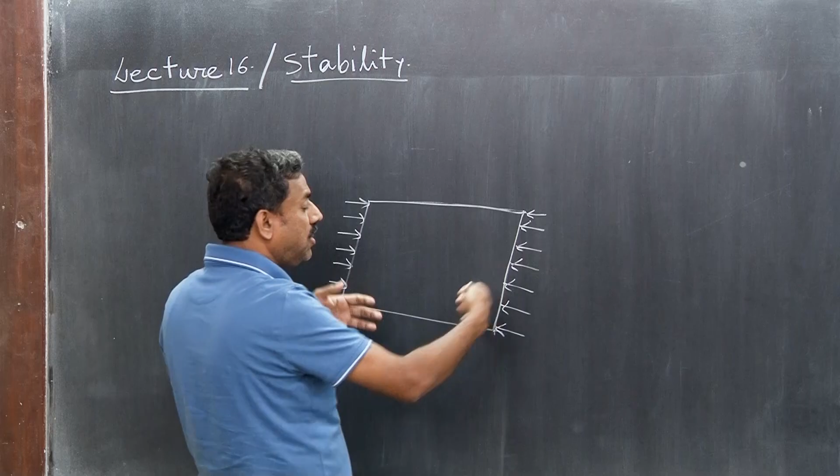We have seen that just on the verge of buckling, the plate is subjected to uniform compression. In the pre-buckling regime also it is uniform compression, but as soon as it buckles and we compress it further beyond critical load, Nx goes beyond critical.

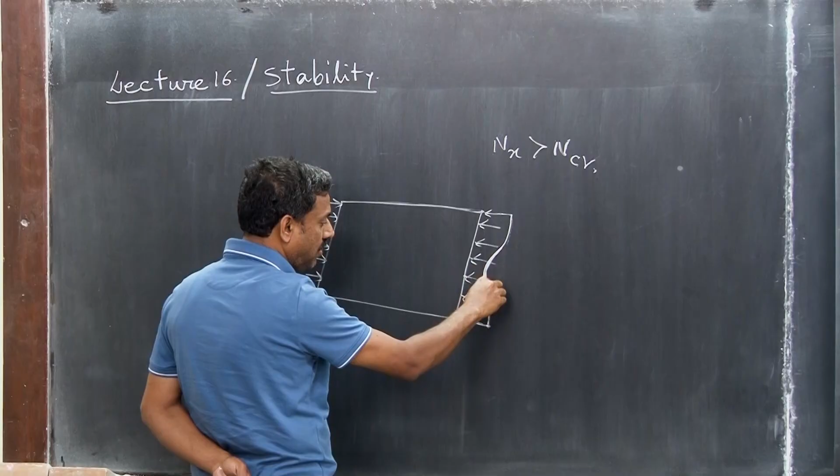So what happens? This force starts redistributing. The end portion starts carrying more load, whereas the middle portion's load-carrying capacity basically reduces. This kind of redistribution occurs, and as you go further, the end carries more load and the middle carries less.

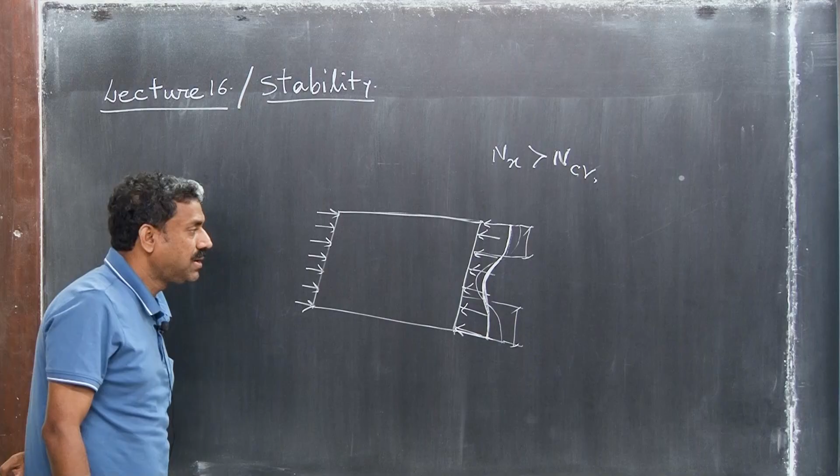At the end we may assume that the load is essentially carried by the two end strips, and from there we introduced a concept like equivalent width for this, which has been adopted in the American and Canadian codes.

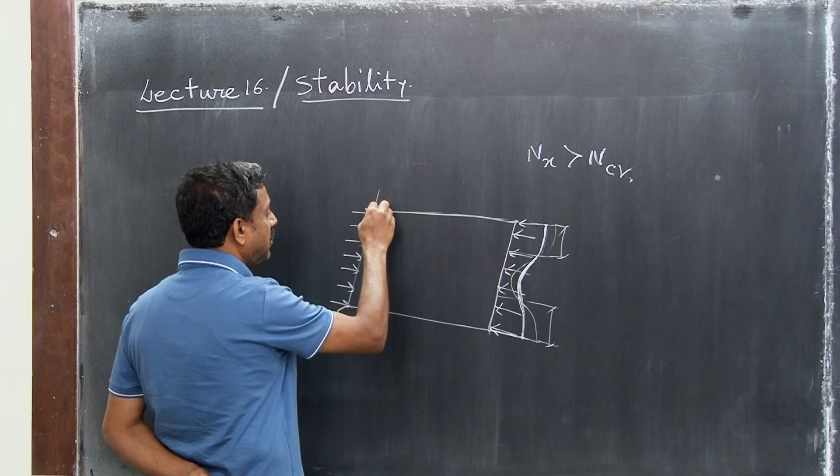Equivalent width BE. Along the transverse direction redistribution also occurs. Earlier, in the pre-buckling regime or even on the verge of buckling, there was no compression or forces in the other direction, but in the post-buckling regime forces develop in that direction too.

Of course, for this redistribution to occur, the plate edges in the other direction, the y direction, must be adequately held in the in-plane direction. Otherwise, if not restrained adequately, it will not allow redistribution to occur. So that is very important.

So redistribution of in-plane forces largely depends on the edge conditions. The end strips still carry a compressive load, but in between they carry tensile forces. That is what basically happens, and these tensile forces lead to stiffening of the plate.

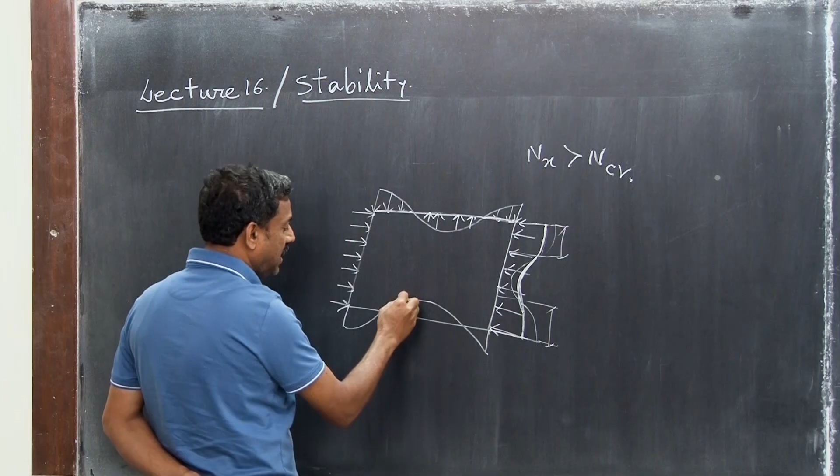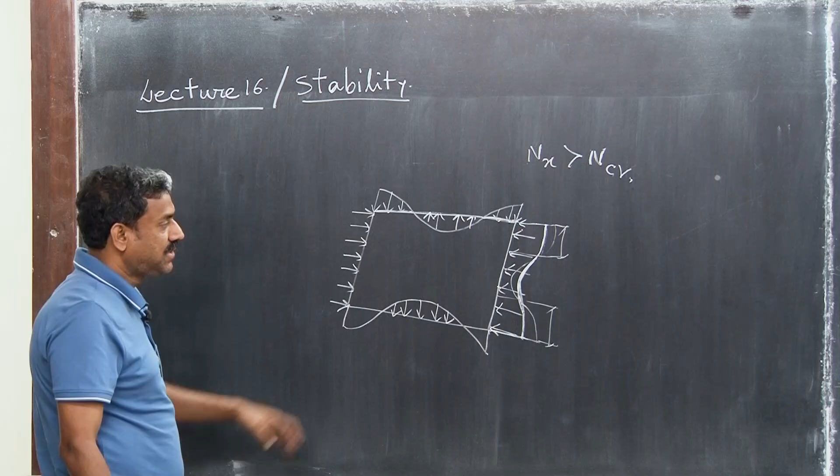We have noticed the erosion of stiffness due to in-plane forces. When the plate is under compression, we have seen how it erodes the out-of-plane stiffness. But tensile force leads to tensile stiffening. That is what essentially happens. This is the solution we followed, given by Volmir around the 1960s.

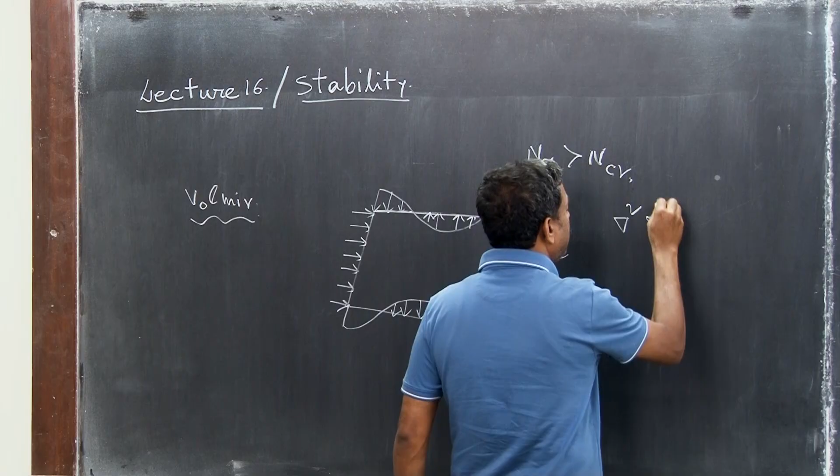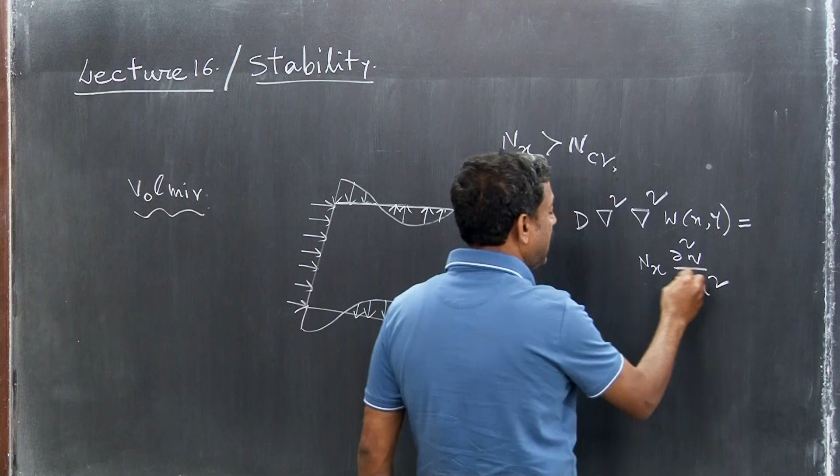A simpler solution was used, but a more rigorous solution can also be obtained. Recall the plate buckling equation: nabla^4 w(x,y) equals Nx times d2w/dx2, where Nx is expressed in terms of the stress function, d2phi/dy2, multiplied by thickness h. The compatibility equation is obtained in terms of w. So there are two equations and two unknowns, w and phi. This equation is of course nonlinear.

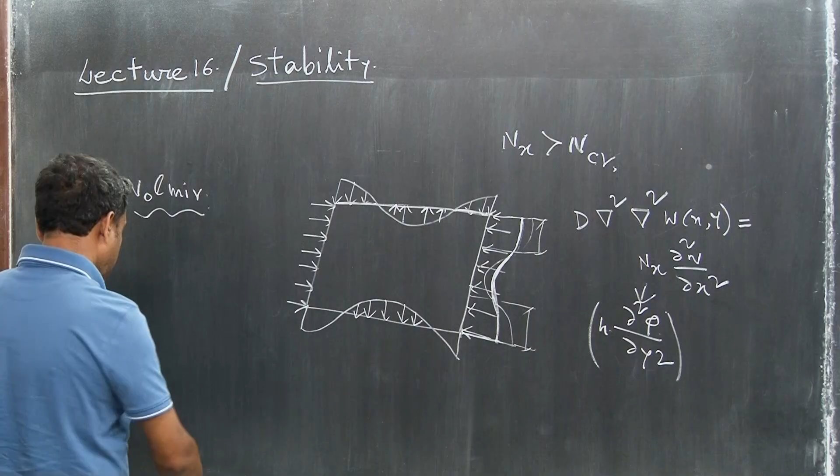Nonlinear differential equations can be solved using the perturbation technique, which is a method for solving nonlinear equations.

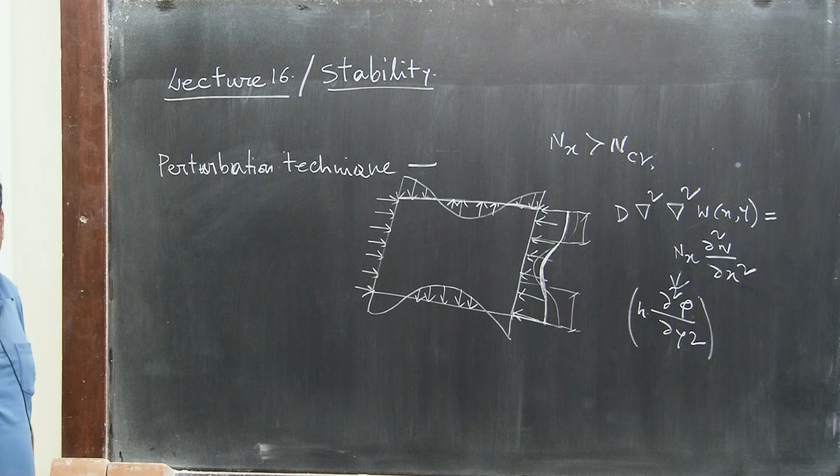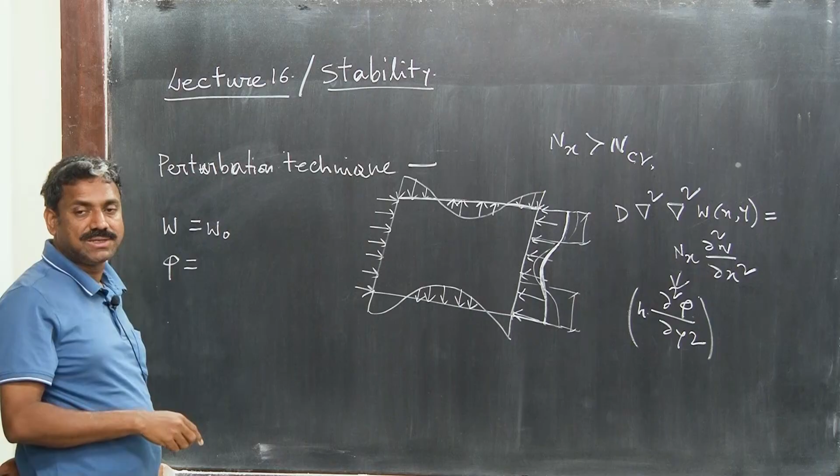In this method, we assume whatever field variable, for example W or phi, occurs as an asymptotic series. So we express W using an asymptotic series: W equals W0 plus epsilon W1 plus epsilon squared W2 and so on, where epsilon is a small parameter that controls the nonlinearity. Epsilon may be explicitly derived from the equation or may not be. This asymptotic expansion is valid when epsilon is small, a very small quantity. There are several variants of the perturbation technique, which is not a problem.

In nonlinear dynamics, consider the Duffing oscillator. There you will see the Poincare-Lindstedt state perturbation, because there not only the field variable but also the nonlinear frequency needs to be perturbed as well. So this is similar to that.

If you have some idea about that, it will be easier to understand. So epsilon is a very small parameter, yet it basically controls the degree of nonlinearity. It can be directly related to the degree of nonlinearity in the system. I am not going into details, but just to give you a little idea.

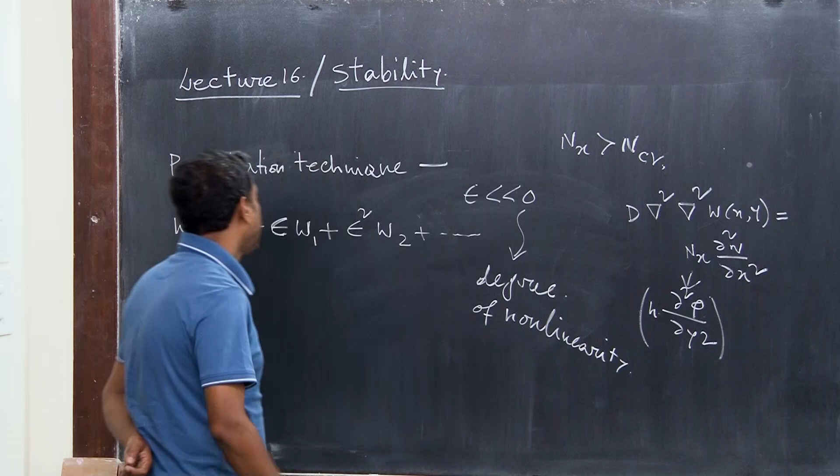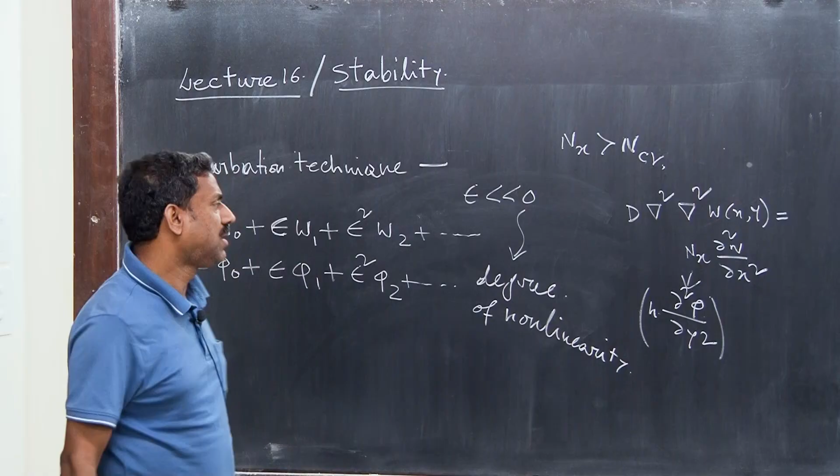Similarly, the other field variable can also be expressed as phi0 plus epsilon phi1 plus epsilon square phi2. Please note you may wonder whether the series is convergent or divergent. Do not worry about convergence and divergence, these are asymptotic theory. We don't care about that, but yes, being epsilon small, higher terms will increasingly contribute less and less. So in that way it is basically convergent effectively, right?

So then we substitute into the differential equation, and then we equate the terms associated. When you take this kind of field variable and substitute it in the nonlinear governing equation, you basically rewrite the equations in terms of epsilon to the power 0 equation plus epsilon to the power 1 equation plus epsilon to the power 2 equation, equal to something. The right hand side also has a similar equation. So then you equate the coefficients associated with this varying power of epsilon.

You understand? Thereby you will see a nonlinear equation can be approximated as a series of linearized equations. And then at the end, once you find out W0, W1, W2, you sum them up and then you will get the solution. Understand that?

Now, a priori, if you don't know what epsilon is, later you can use the boundary conditions and other relations to find out what epsilon is. But in many instances, epsilon can be explicitly determined through scaling of the equation, and so on.

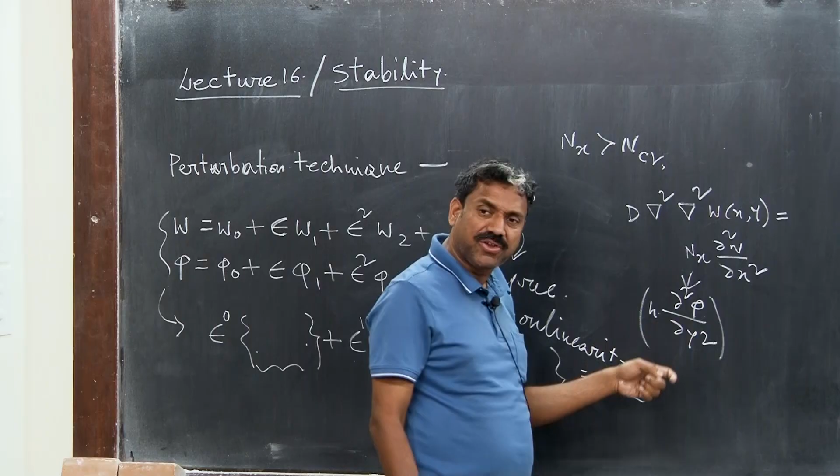Now, because we have already expressed the in-plane forces in terms of a stress function, that's why we treat phi, the stress function, also as a field variable. But please note that there are perturbation techniques in which we don't require expressing nx in terms of a stress function.

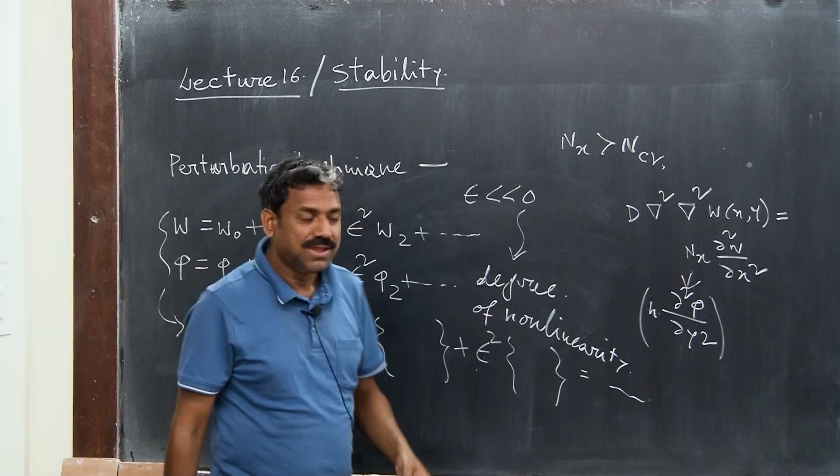Rather, we can directly perturb nx. So you will see that nx can also be expressed as nx0 plus epsilon nx1 plus epsilon square nx2. This kind of perturbation is also possible, and you do not require to take many terms. This is the zeroth order equation, this is the first order, this is the second order equation. That way you can also do it.

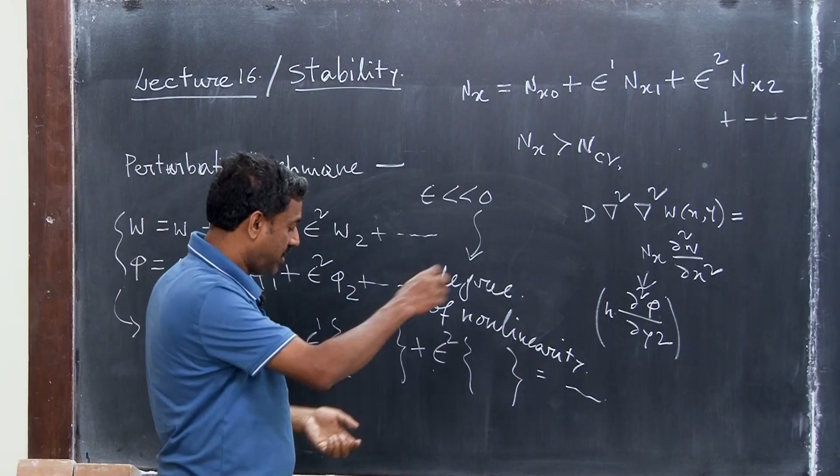But here I will just show it once, quickly we will go through. This involves lots of algebra, so I won't do that in detail, but I will just show you so that you have a little idea about it.

So please look at this screen. I am referring to two-step perturbation because this is a specialized technique, but essentially it will give you the feel. So I have used it. One of my previous PhD students who worked on this derived all of this.

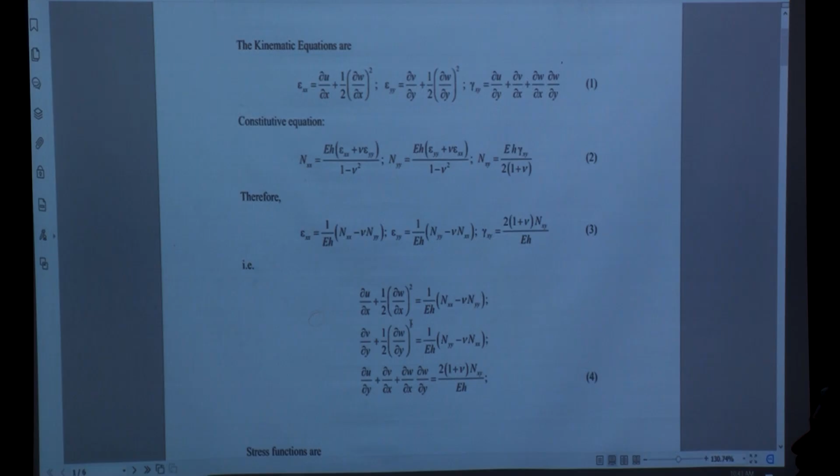Now all these equations you already know, right? Because we have derived this already. So ultimately we arrive at these governing equations, right? This is the governing equation, right?

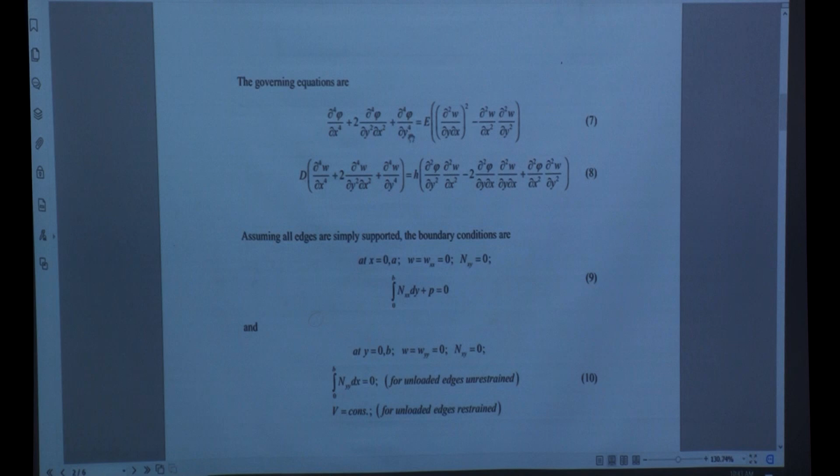Along with that we get the boundary conditions. So at this edge, the simply supported boundary conditions for W, right? And then this equation comes from P, if P is the axial force being applied. Then you can integrate the in-plane forces over the edge, and you will get the equilibrium equation.

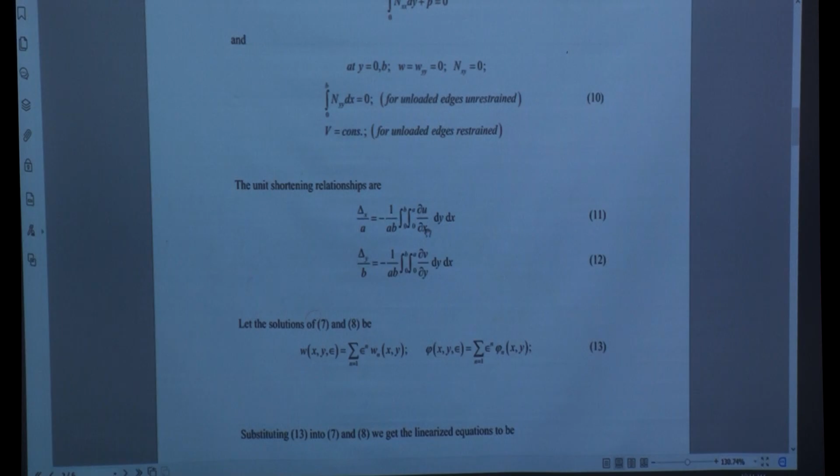For edge y0, you can also write this equilibrium boundary condition, simply supported. Similarly, there is no in-plane force in the y direction, so integrate and make it zero, but in the other direction there will be in-plane shear because of the restraint. Now you can also express the unit shortening by integrating the strain over the length and dividing over the edge length, getting the unit shortening per unit width for both the x and y directions, right?

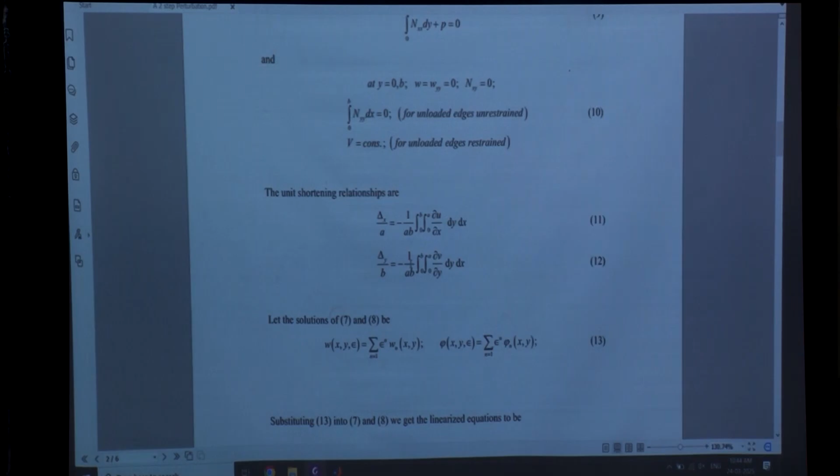Then we assume the solution W and phi. There are two field variables, W and phi, right?

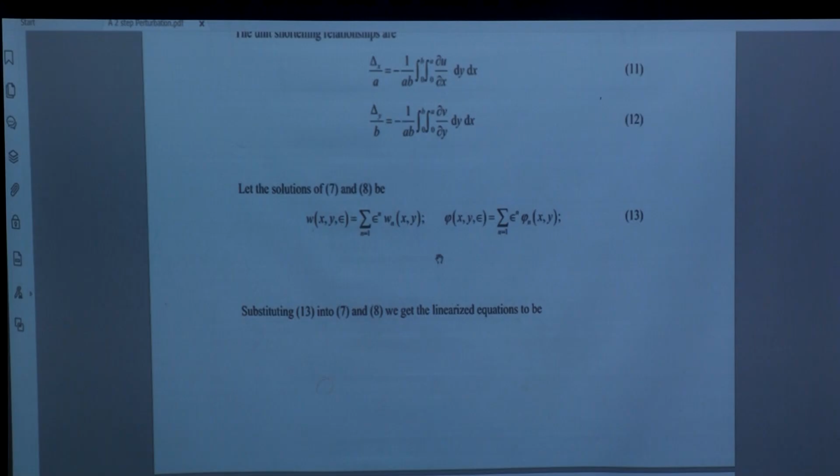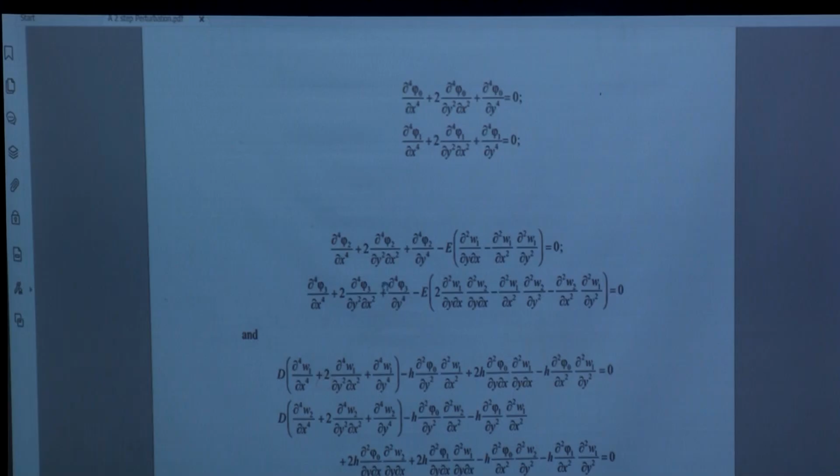Then you substitute and get the linearized equations. These are the linearized equations in terms of phi 0 and phi 1, then in terms of phi 2 and phi 3. The first one is homogeneous, but phi 2 and phi 3 are expressed in terms of W1 and W2. So you see that if you decide phi 0, you can get phi 2. You assume some W1, substitute, get phi 2, and with phi 2 and an assumed W2, you get the next result.

All these are linearized equations, and it's easy to solve them because we know how to solve linearized equations. Nowadays, with symbolic computation in Maple and Mathematica, you can do these things very effectively. That's what we did, because otherwise the equations become very complicated. I've seen equations using perturbation that take an hour, even several hours, to solve, but it's actually quite beautiful.

So then you see the linearized equations, I am writing all these equations in terms of W1, W2, W0. So let me show this. This is the zeroth order equation. Capital O here refers to order, so this is the zeroth order equation.

Nabla 4 phi 0 equals 0 — nabla 4 is not the correct notation, but people write it that way; it's actually nabla square, the Laplacian. So the solution for the zeroth order can be expressed as phi 0 is something like this. Then phi 1 and W1 appear in the first order equation in terms of phi 1 and W1.

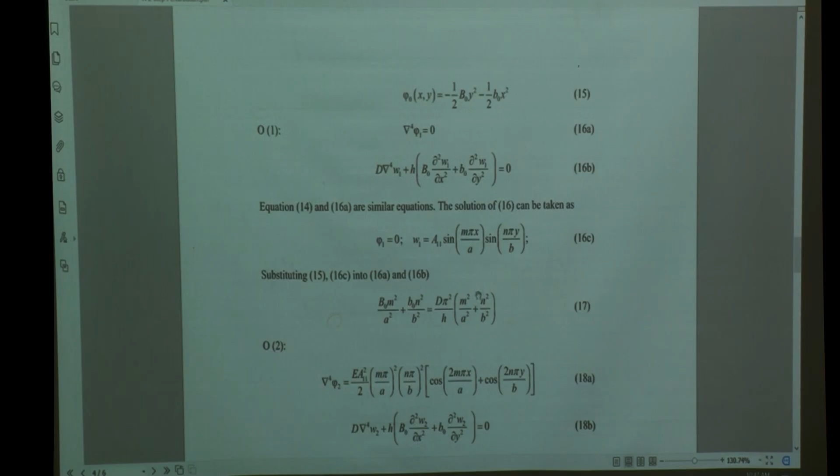Similarly, for the second order equation, you get the equation for phi 2, the second order approximation for the stress function, and the second order approximation for W2. You see another two equations in terms of the Laplacian, with the right hand side being whatever terms you obtained from the previous equations.

Here again, for equation 18, you see that if you solve the equation for phi 2, since it's linear, it can be expressed in terms of this. But once again it turns out W2 can be identically satisfied, so W2 is 0. Then you substitute this expression into equation 18a, and from there you get the unknown coefficients.

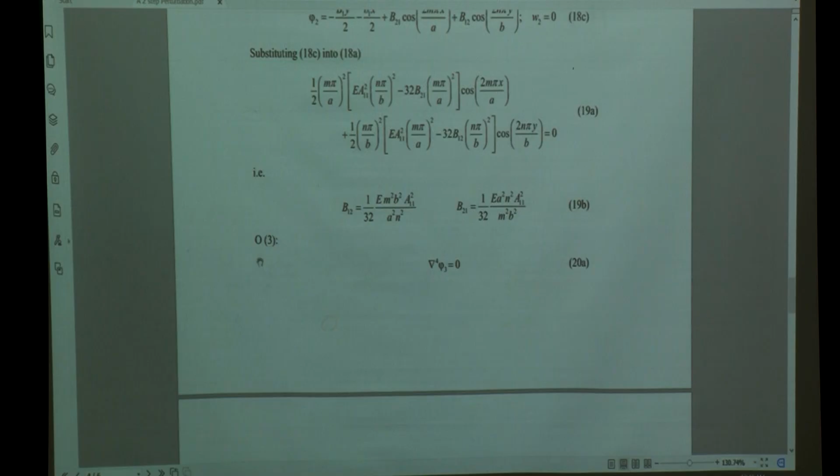Now you take the third order equation, similarly for phi 3 and W3. Once again you see it alternating: in one approximation phi 1 is zero and W1 has some expression; in the next order approximation, W is non-zero but phi 3 is zero.

Why does this happen? I can give you an analogy, because this occurs due to the symmetry and anti-symmetry of the mode shape. I won't go into full detail, but I recall there's a very beautiful physics behind this. Because some displacement field or field variable has symmetry, all the anti-symmetric terms will be zero, that's the reason.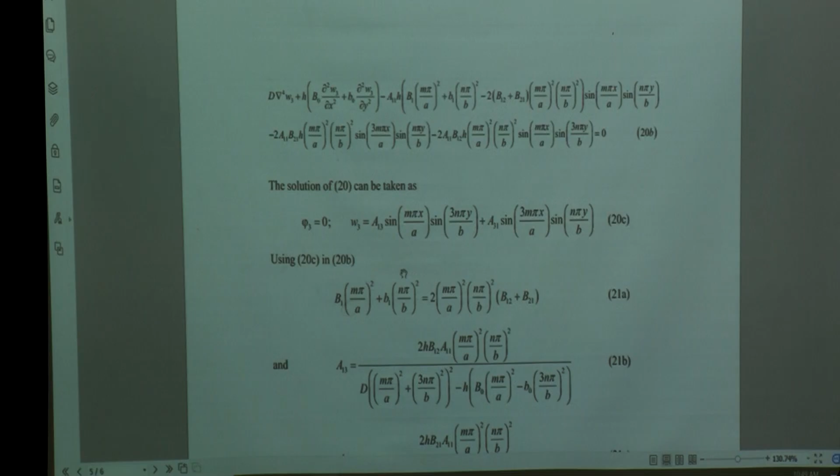Anyway, with this kind of progression we can get all these things, and finally we will get the asymptotic solution. Why asymptotic? Because it is associated with epsilon to the zeroth power, epsilon squared, and so on. Please see what phi actually is.

Phi is an even function. Why is phi an even function? Because it appears as epsilon square, it is even in terms of epsilon, you see epsilon to the 0 and epsilon square. Whether W contains terms of epsilon and epsilon cube - so, W basically contains the odd term of epsilon, while the stress function contains the even term, and the other contains the odd term in terms of epsilon. So that is the difference between phi and W.

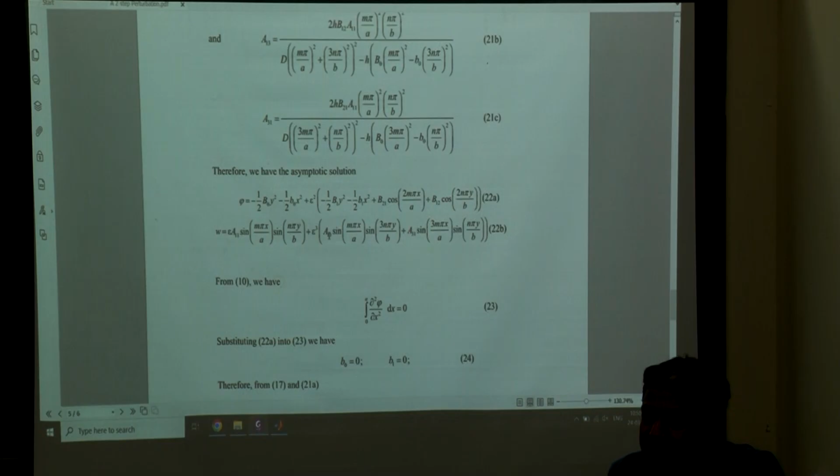So the approximation, whatever is associated with epsilon in terms of the same term in phi, is equal to 0. So then why do we call this an asymptotic solution? Because it is coming from an asymptotic series, right.

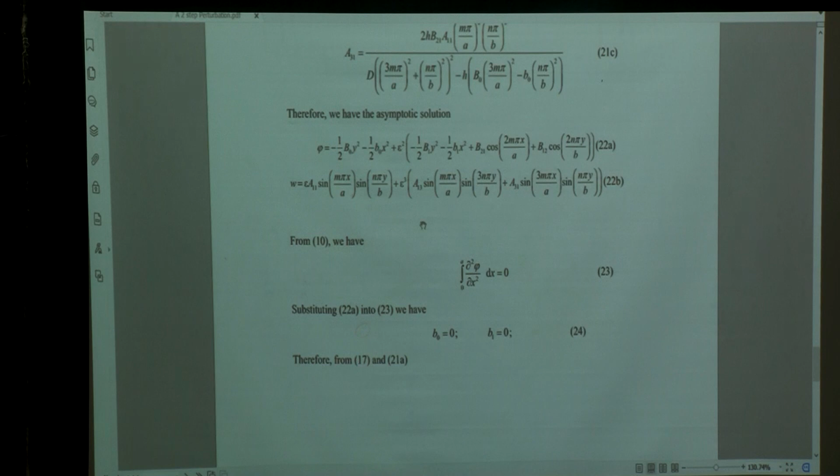And then whatever unknown coefficients, you can enforce the boundary condition. So then equilibrium condition, from here you will get the equation, then another equilibrium, you enforce this boundary condition, you will get P, okay. End shortening you can also find out.

Now from here, what is epsilon? That we do not know. Epsilon can be related with deflection, you see the maximum deflection is given by this. If you substitute in this equation, W max will be epsilon. Why W max? Because when you find the out of plane deflection, you put x equal to a by 2, y equal to b by 2, W max is equal to epsilon.

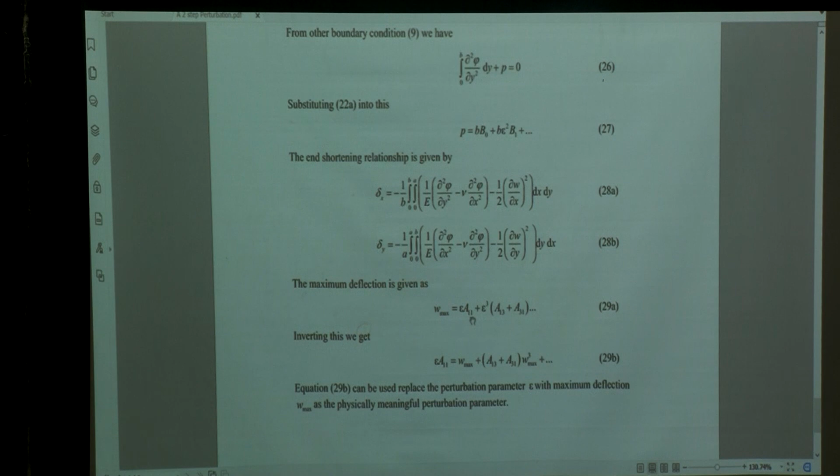A11 plus epsilon cube A13 plus A31, and if you invert this relationship, you can find epsilon A11 is equal to this. Now you see what is epsilon now? Epsilon is nothing but W max plus something into W max cube. So do you understand from that how epsilon controls the nonlinearity?

See, epsilon is directly related to out of plane deflection. More out of plane deflection will mobilize, is causing more nonlinearity, because it is pushing, it is mobilizing more post-critical redistribution, and that you can clearly see from here, because epsilon is W max plus something into W max cube. Now W max is a small quantity, the deflection will be much smaller compared to the in-plane forces. So the smallness of epsilon can also be justified from these things, from expression 29b, right?

Clear? So epsilon is basically a variable which controls the nonlinearity, which controls, in this case, the degree of post-criticality, if you think so. It can be, I don't know whether it can be considered a kind of order parameter. Order parameter - this concept is used in physics, it's a generalized term, okay, for a system's behavior, how it changes, okay. It can become - so it's a term which controls nonlinearity.

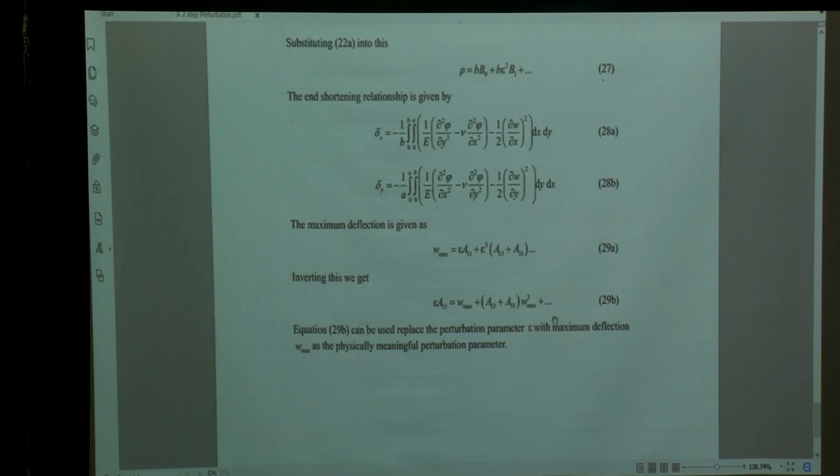And another thing is that its smallness can also be justified in many instances. So that is the way. I will send this to you, you can go through that, you do not essentially need to work it out, but keep with you the concept of how these equations are solved rigorously, because whatever we have done using Volmir solution was a little simplified and ad hoc. And if you want to do research using Volmir solution, you will never be able to do anything. You have to have a very - because science and work in this area has progressed long.

So if you want to contribute any new solution, you have to learn perturbation and asymptotic expansion techniques. Mechanical engineering people are very conversant with that, they do that. And in civil engineering we are a little behind, okay. And this concept is not only applicable here, but please note that this is also equally applicable in nonlinear dynamics, okay. So in case of a Duffing oscillator, when you try to find a closed form solution, you will see that we use these approximations, okay.

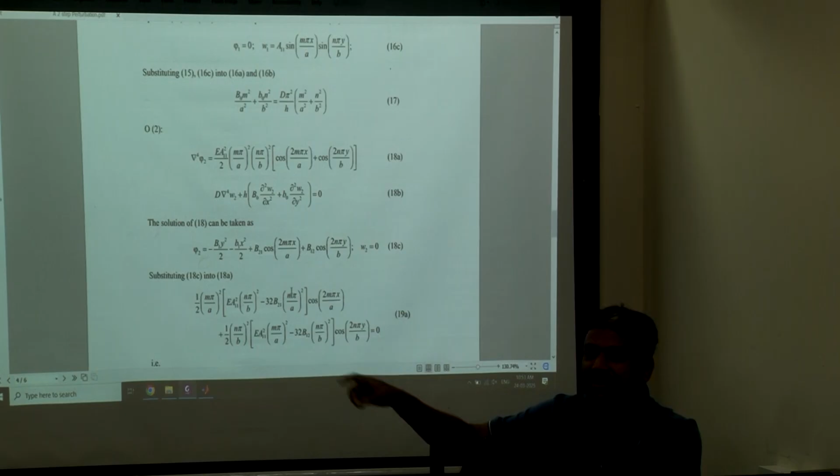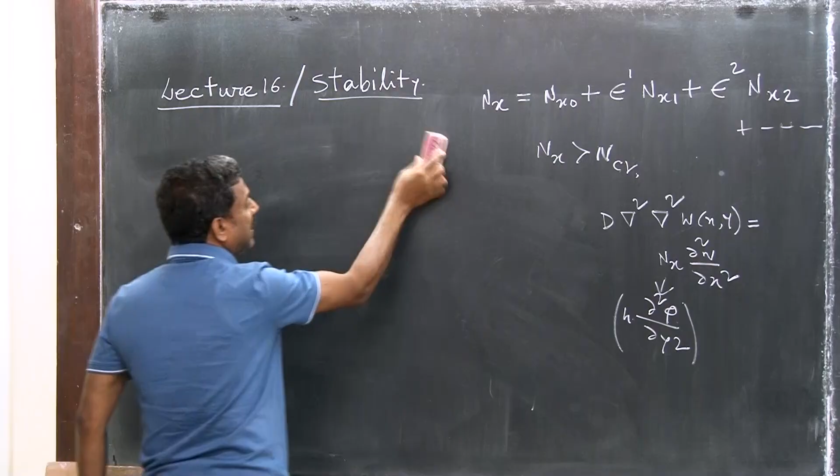I will say what we do basically, okay, fine. So let me tell you. You see, here the field variables are W and phi. That's what we perturb like this. But if we don't use this, if we do not express Nx in terms of the stress function, then we can directly solve the equation in terms of Nx.

And please note that we can have an asymptotic expansion. There are papers in the literature in which this kind of expansion has been substituted, and there also you can solve it.

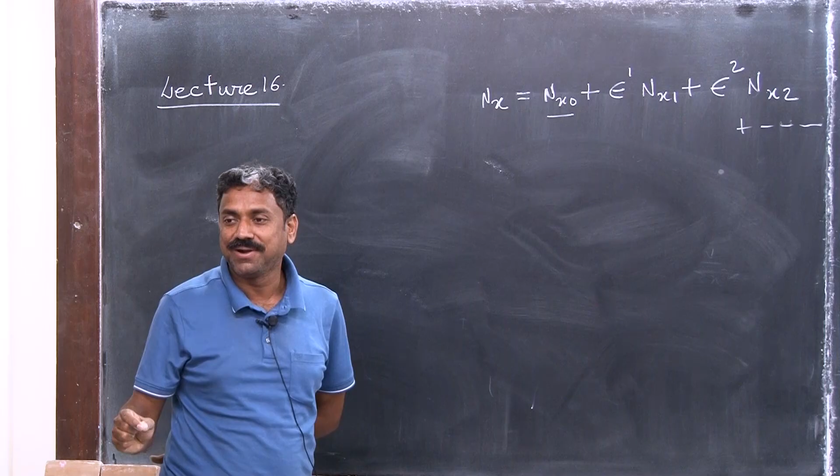So you see that. The zeroth order equation Nx0 essentially gives you the pre-critical, or pre-buckling, scenario. Then Nx1, Nx2 are the terms which basically contribute in describing whatever redistribution is occurring, and there is this in-plane change occurring in the in-plane forces. Okay, so that is it.

So in dynamics also a similar analogy exists, something like U double dot plus omega square U, plus say some parameter epsilon U cubed, is equal to F(t). We have learned about these two terms in our dynamics, right? Mu double dot plus K is equal to zero, so omega. But as soon as there is some nonlinear term, that becomes - what kind of nonlinearity is this? This is cubic nonlinearity, with a small term epsilon.

So that epsilon controls the nonlinearity. You see the similarity between these two. There you see that when you want to solve this equation, it is called a Duffing oscillator. This describes the equation of a Duffing oscillator. Many problems, including geometric nonlinear problems, can be reduced to a Duffing oscillator problem - the vibration of a system in presence of geometric nonlinearity.

U can be expressed as U0 plus epsilon U1 plus epsilon square U2, something like this. If you substitute this directly, you will see that you will not get the correct solution - you will have a solution which you will not be able to capture. At the same time, you have to perturb omega also: omega will be omega0 plus epsilon omega1 plus epsilon square omega2, and things like that. This is called the Poincaré Lindstedt technique.

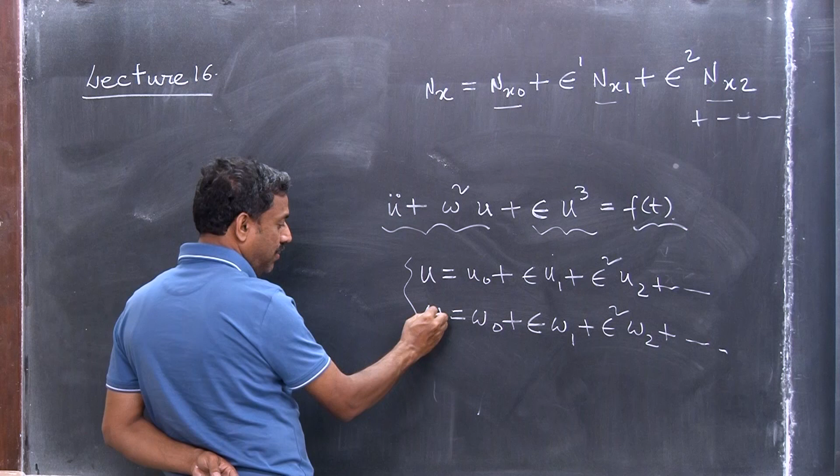You have to perturb the equation because its natural frequency will no longer be constant - it will also vary, it's a nonlinear frequency. With the response, frequency will vary, it will change. So that change you have to capture.

This is called Poincaré Lindstedt perturbation, and similarly there will be linearized equations - zeroth order, first order, second order equations, all linear. So you can solve one after another and sum them up to get an asymptotic expansion for U, and also an asymptotic expansion for omega. Thereby you can clearly see that epsilon is a very small quantity, because it controls the degree of cubic nonlinearity, first order, say third order term.

Could you please tell me why it cannot be a second order term, U square? F is equal to KU, right? So the sign needs to be maintained. If you use a square term, that means if you are applying positive force, negative displacement would occur.

Negative stiffness cannot occur physically. There are devices that exist in control - structural vibration control or passive control - where you can have a negative stiffness device that you can design, but that's not physical. In physical terms, you cannot have negative stiffness, right? You can pull a spring - for positive displacement there will be positive restoring force, right?

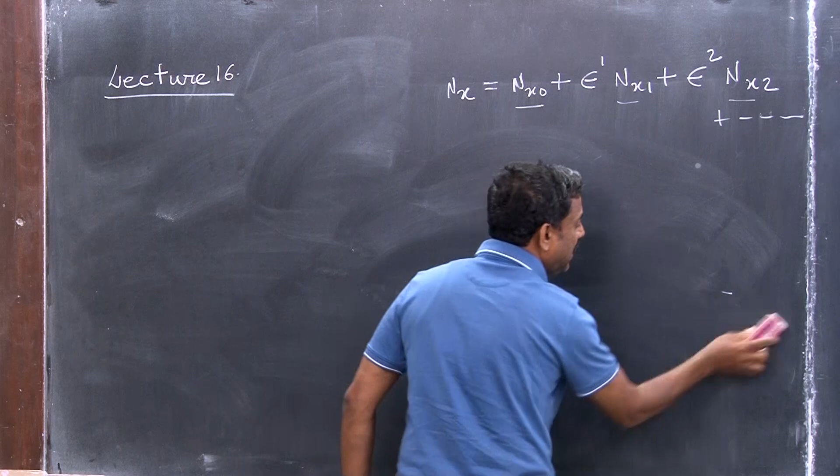Anyway, good. So with this, I stop the discussion here on plate buckling and post-buckling behavior. Logically we should now go to the theory of shell buckling, but I will not jump there yet because we will cover that later. Right now we are going to concentrate on dynamic stability - how dynamics is important and why dynamic stability is important. There are various forms of dynamic stability that come into real scenarios, and the treatment itself will come later. But before that, there is a small thing I would like to demonstrate.

All of you are aware of the Eigen buckling analysis for the frame. I will just demonstrate a computer program that I have written and shared with you. So how is that program written? Quickly I will go through it and send it to you by mail. I will show you the structures. Those of you who are conversant with finite element coding will find this very simple, but I will emphasize two important steps here while coding.

This will be in parity with whatever you do when you perform Eigen buckling analysis using commercial software that is a little more advanced, not like STAAD - using Abaqus or ANSYS or similar software which have advanced features. Not like STAAD - this thing was missing there. So let me show it to you. Please note here, this program is very simple.

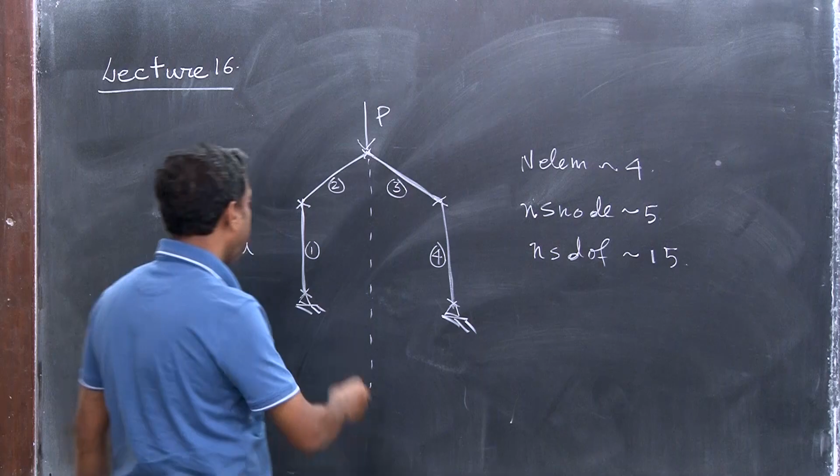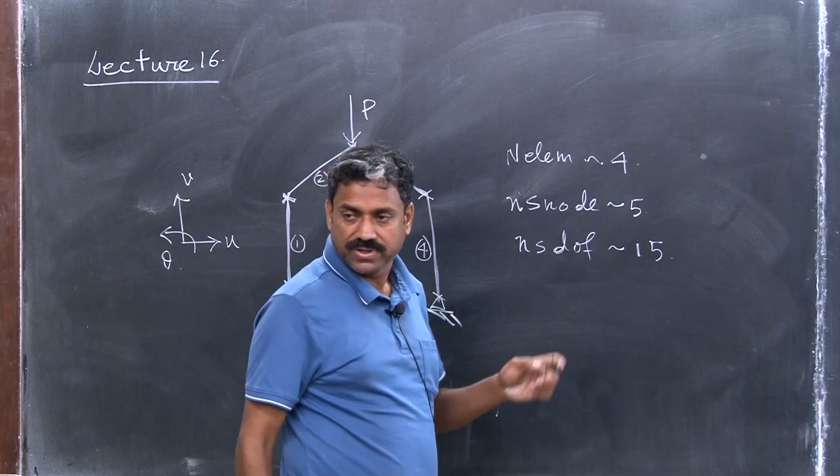Number of element nodes - each element has 2. These are all 2-noded beam column elements. So 2 nodes, number of nodes in each element is 2. Number of degrees of freedom in each node is 3. This can be changed for anything.

So I will demonstrate with respect to that frame. Now you see, load coordinate dot text means you first load a file which contains the coordinates. What are the coordinates? Can I open this one from here? This is a PPT file though.

You see, this is the way it is. This is 0, 0. I am taking -3, 0. This is the nodal coordinate, okay. This is basically 3 meters. This is 5 meters. This is a Gable frame - I am closing it. So all this nodal coordinate I am giving as input, right?

Then here what I am writing - basically I am just taking coordinate dot text and transferring it to another array, coordinate array. So coordinate zeros, I am defining its size of the array, and then I am running a loop for number of structural nodes or number of element nodes, for all structural element nodes. So each node has a coordinate, right? I, j, essentially transferring to another. Then I am loading the connectivity.

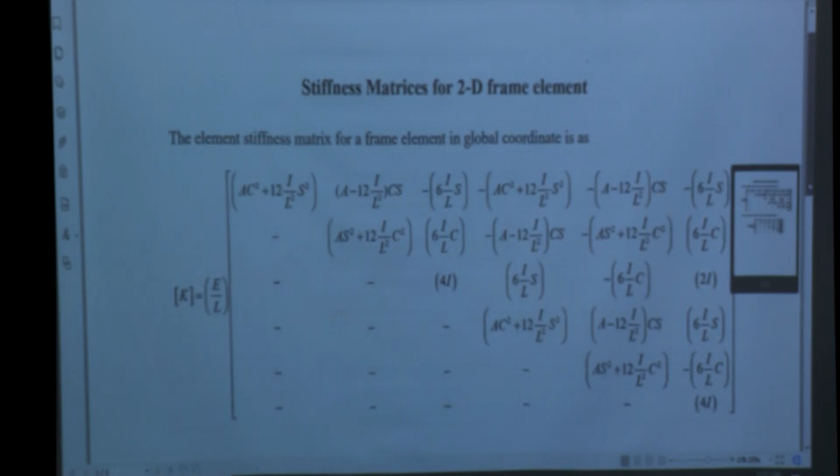So material stiffness matrix, here you see these are the 6 by 6 stiffness matrix I have written. First I am populating the upper triangular matrix, and then for symmetry I am completing it. You see this is the 6 by 6 matrix, and this is how it looks. I have derived this 6 by 6 matrix using global coordinates, that is why it is a function of cos theta and sin theta. This is the element stiffness matrix, and this is the geometric stiffness matrix, fine.

So then what we have to do, after the element loop we have to run a loop over the node. So for I node equal to 1 to number of nodes, and LP node I means the first node to which it is connected is LP node. Now you have to recall the nodal connectivity, I element comma I node. So first the looping is over elements, then looping over nodes, then there will be looping over degrees of freedom.

But please note that because the stiffness matrix has 2 indices, i and j, the nodal and degree of freedom looping should appear twice. So first I will identify the index which fixes the row, and then I will have another index that fixes the column. That is why you see LP node I is the node to which it is connected, then there is a degree of freedom index, 1 to n.

So when I go to each node, after that, on each node there will be a loop over the degrees of freedom, I node 1 to number of degrees of freedom. Then I find out what is the structural degree of freedom and what is the element degree of freedom, IS degree of freedom and IL. So IS degree of freedom will be: the global node with which it is connected, so LP node I minus 1 into n degree of freedom plus I degree of freedom. And the element degree of freedom will be I node, meaning the node on which the loop is running, I node minus 1 into n degree of freedom plus I degree of freedom. Understand that? Which one is the global index and which one is the local, element index and structural index. The structural degree of freedom is you picking up the node in the structural node numbering.

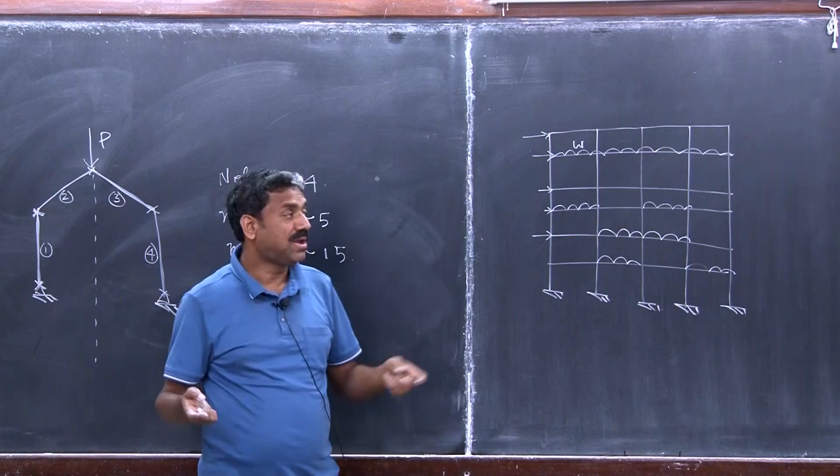And I asked you to find out what will be the W value. So once again, this is the frame, a two-dimensional frame, and you can use the same computer code for solving this. You discretize it using elements, and try to find out the nodal coordinates, nodal connectivity, element connectivity array, the fixity array, and all these things. Then you first solve it statically to find out the axial forces in the member, and then you construct the geometric stiffness matrix, and solve the eigenvalue problem.

Okay, so this problem can be solved. One point of time, let me recall, please put your attention and try to concentrate on this.

I recall once in your experimental methods course, there is an experiment, I don't know this year whether it is being conducted or not, on buckling of frame. So these people were all confused about how to theoretically find out the buckling load for a frame, and they were searching Timoshenko and other books. But it's very simple using matrix method, or finite element method.

So whatever you are learning, try to retain it. It shouldn't be volatile memory, right? In computer there are two types, permanent memory and volatile memory. It shouldn't be like volatile memory, where you learn and then it evaporates from here. Anyway, okay, so that's what I will cover a little bit, just to sensitize you to the computer programming and things.

Now I will just go to dynamic. I will start dynamic stability. Dynamic.

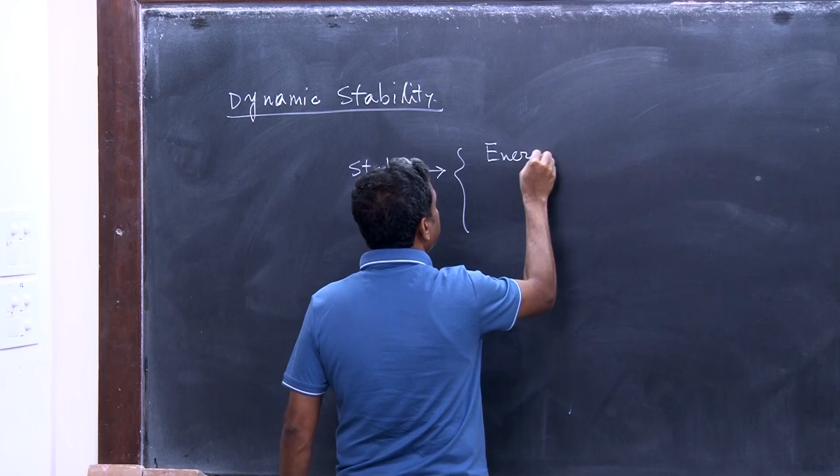So why dynamic stability? What was the problem in the static stability? Till now, when we approached static stability, we used two formalisms. One, the most convenient, and which we loved, is the energy method. And another way, of course, is the equilibrium approach, directly solving the equilibrium equations.

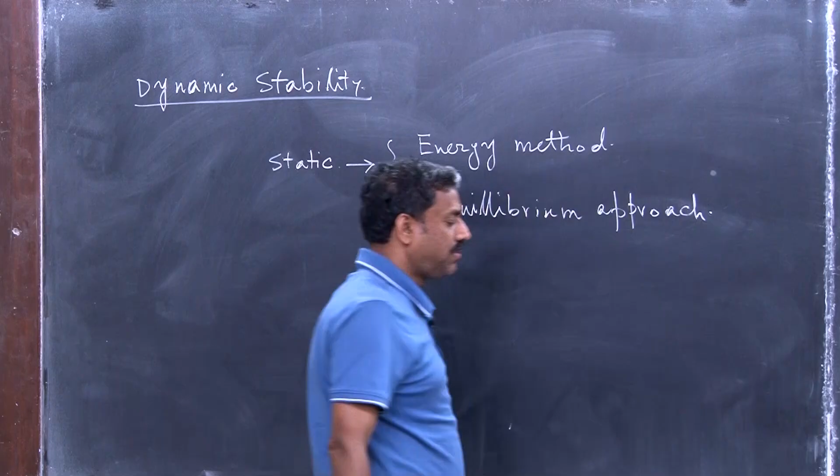We have used both the equilibrium approach, where you have to write down the equilibrium equation in the deformed or perturbed configuration, and the energy approach. This worked well, and we have solved a number of problems. We started with a toy problem, demonstrated different classes of behavior and different classes of systems, and then used the same approach for analyzing buckling of column, post-critical analysis in column, buckling of plate, and post-critical analysis of plate, and so on. Both approaches you have followed.

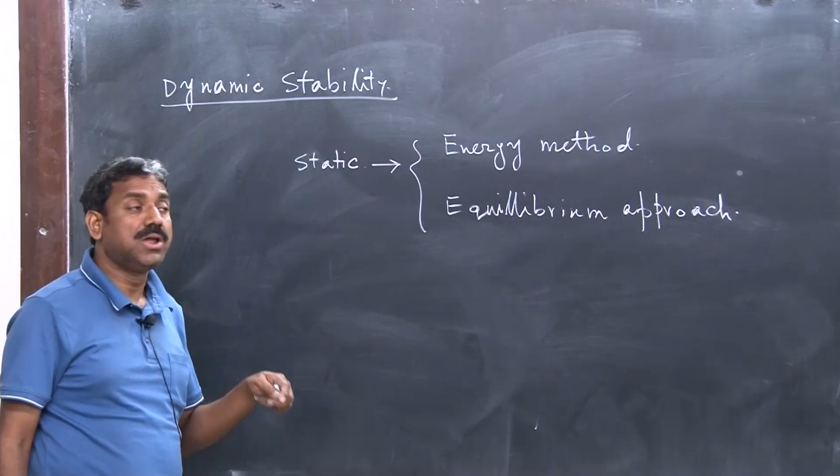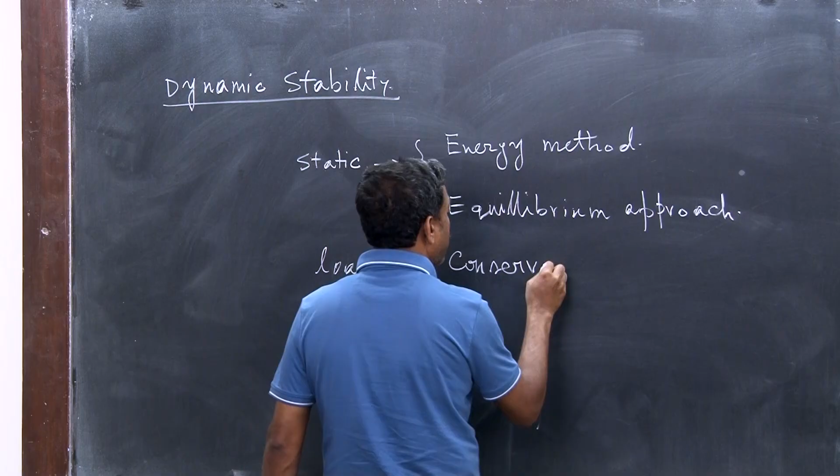Now the problem with the static approach is that, in all the cases we considered, our loads were all conservative loads. Our loading was all conservative. What is conservative loading?

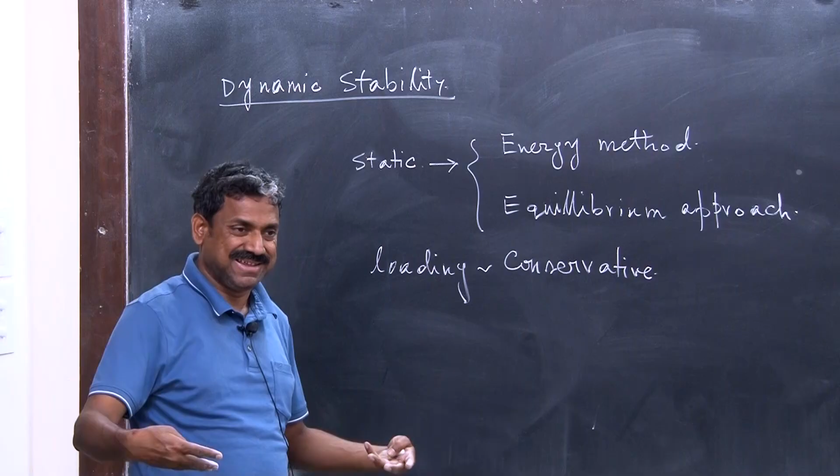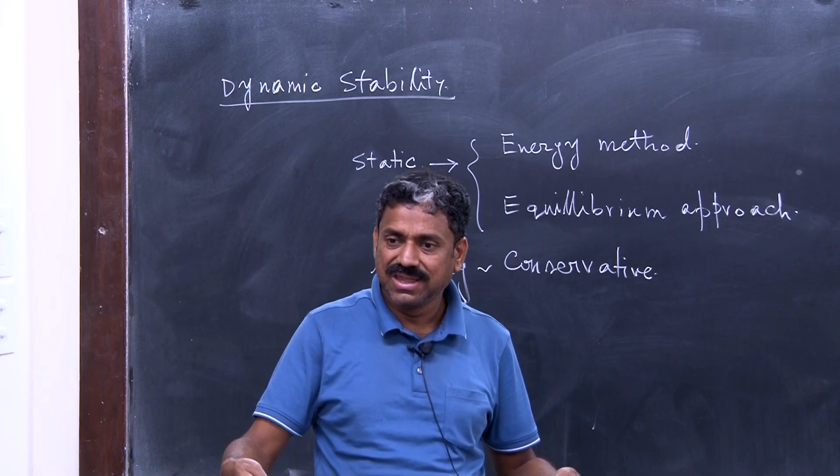Conservative loading means there is no dissipation involved in the loading. When this load is working on the system, the loading is doing some work, right? For a column or a plate, the load is doing work because of the axial compression, axial deformation, and that is being stored as strain energy in the plate or column. So as soon as the load is removed, that strain energy will also be gradually recovered. So the energy stored, there is no dissipation of it, there is no work done which will go away. You see that?

So that is conservative. That means the system is path independent, however the load is being applied, and there is no dissipation of energy. An example of non-conservative force is friction. If you pull a block on a rough surface, that friction force will work on it, and that work done will never be recovered. There is some dissipation. But here, all the forces were conservative.

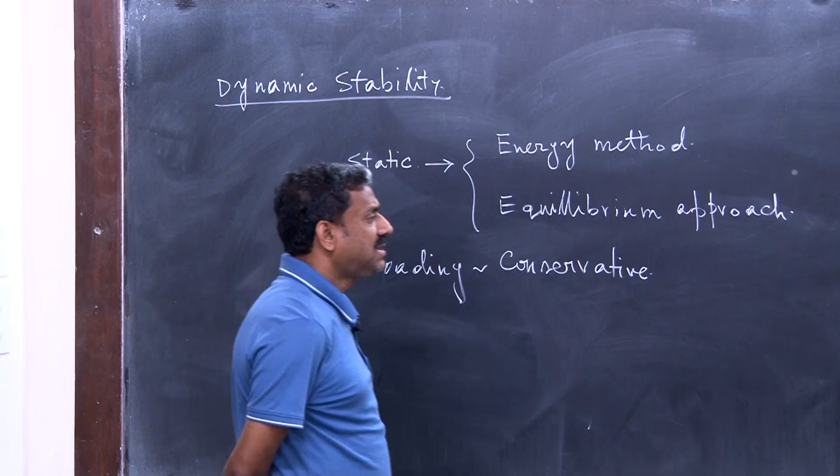Now there are situations in which the forces may not be conservative, and in that case this approach, the energy or equilibrium approach, will not work. It basically took time for scientists to realize that.

So it's not that all static methods fail, but there was a problem that remained unsolved for a long time, and it was later solved using dynamics. Let me show you that example of how the static approach was failing.

We have to invite the component which is causing non-conservatism in the system. If there is a component of non-conservative force, then the treatment of stability should include consideration of the dynamics of the problem. Otherwise, you cannot capture the influence of that. This fact was not accounted for in the past, giving a false notion and false results. People didn't believe it and were confused, and then later the problem was solved.

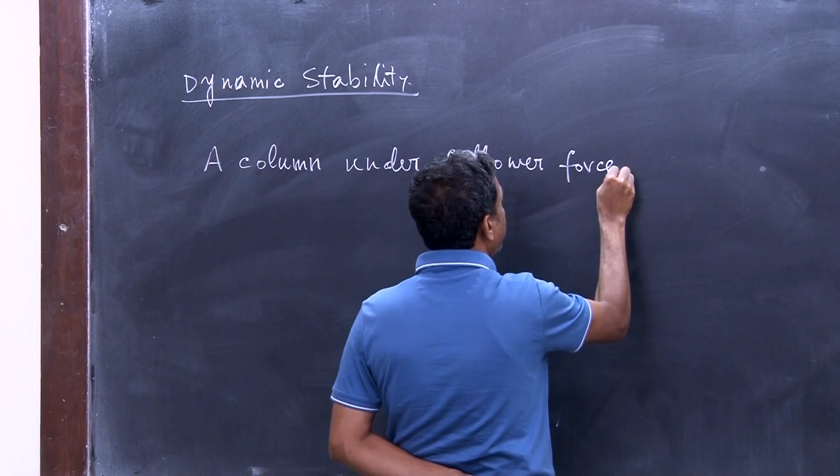So this problem is a column under follower force. Follower force is a force which follows the deformation. So here, let me consider a column.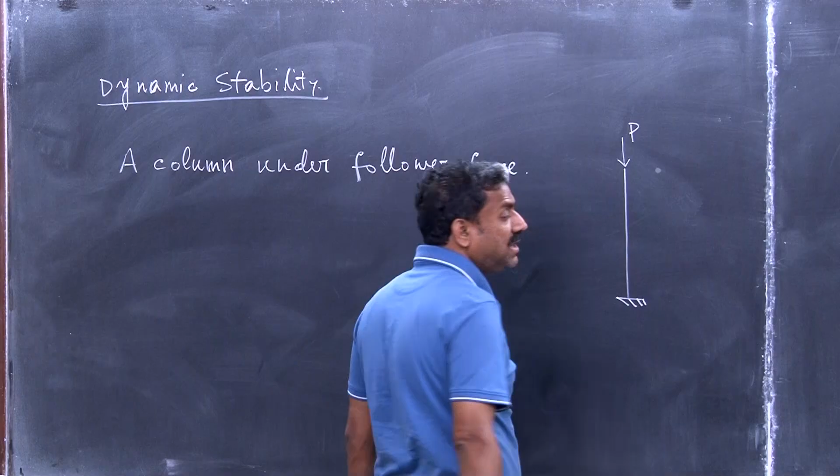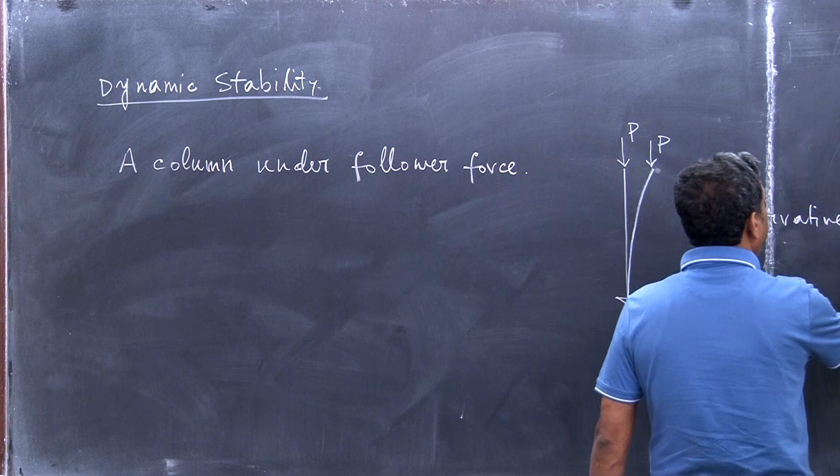This column, as soon as it's subjected to a vertically downward force, compression on the column, this is conservative. Even when it is deflecting, if it remains like this, these are all conservative forces. Conservative force P, vertically downward, P remains vertical at all instances.

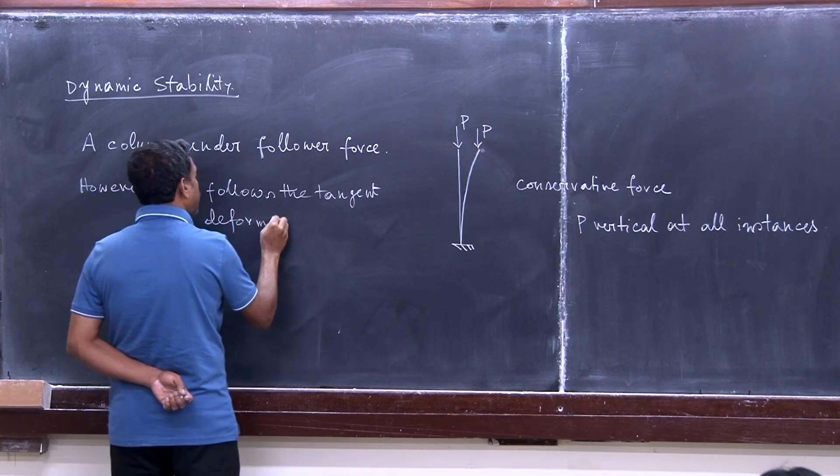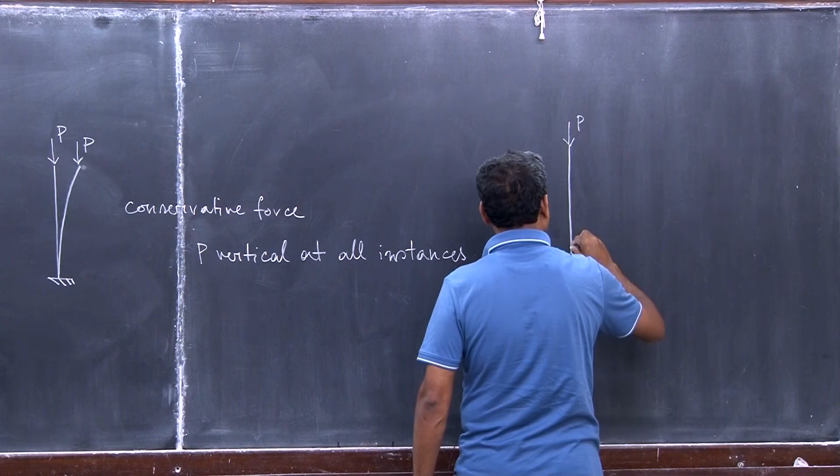However, now consider the case if P follows the tangent at the deformed tip. Then what will happen? There will be a column, and as soon as it deforms, P is following the tangent.

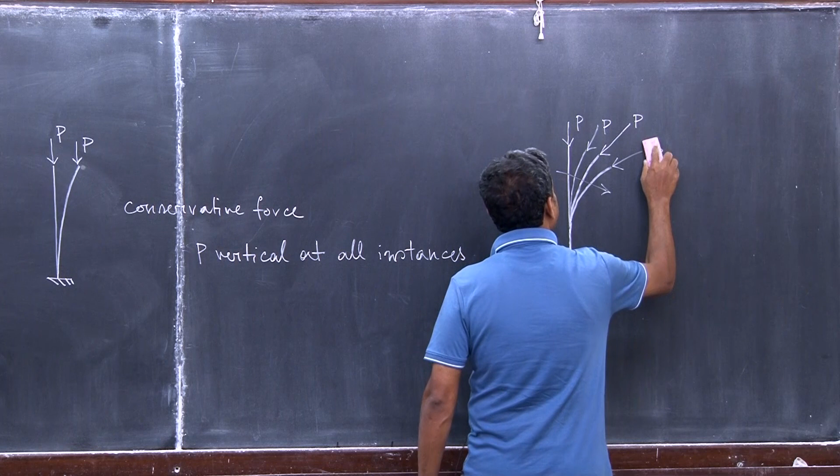When it deforms, it is following the tangent direction, P. You see the way it is changing, P is changing its direction, because P is following the tangent to the deformed column at the tip. So this is a non-conservative force. This system becomes non-conservative. Why it is so, I will explain to you.

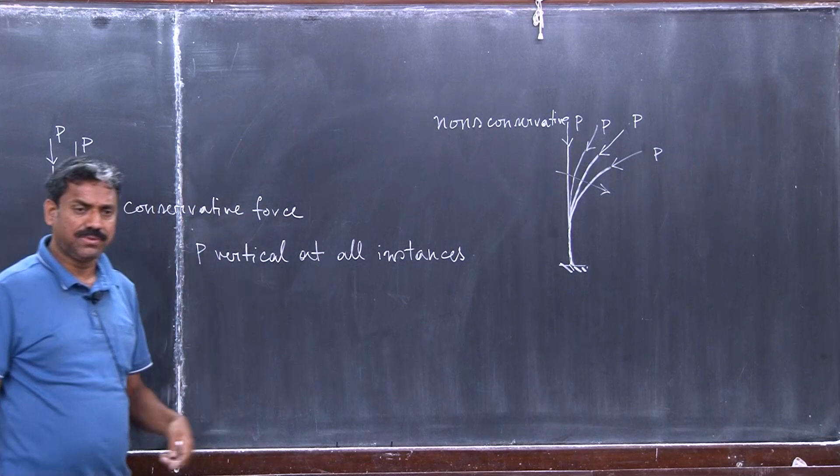People started to look into this problem. They tried to solve it using the static method, and they all failed miserably. I will show you why. Let us consider how people started solving it and why they were failing. That was basically when people started the dynamic approach, since the static approach cannot solve this problem.

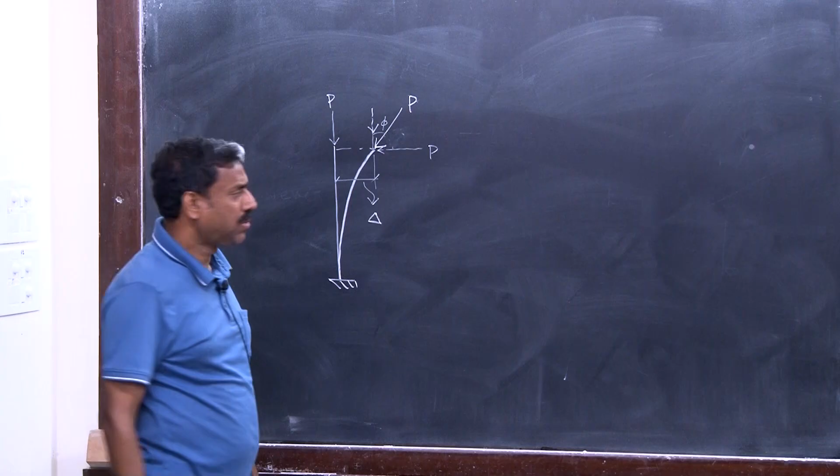So it will have two components. I am assuming this angle is phi and this deflection is delta. So P, instead of treating this to be phi directly, I will treat the angle with this to be phi, assuming phi is still small. So it is P sine phi, and this component is P cosine of phi. Do you see that? These are the component forces.

So now you tell me one thing. I am assuming x is defined like this, and w is the deflection as a function of x.

Now this problem, what is bending moment at any section x? If I consider any section here, what is the bending moment? The bending moment will be contributed by these two components.

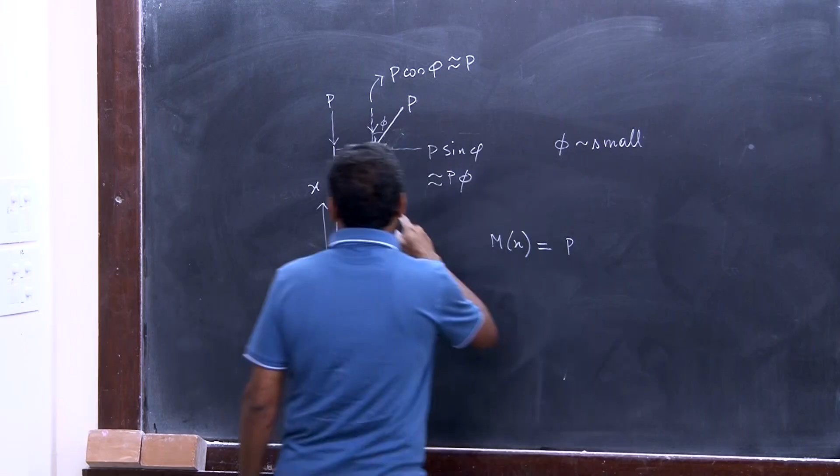One component is P into this distance. If this is delta and this is small w, this distance from here to here is delta minus W, right? This is trying to cause clockwise rotation, and this fellow is trying to make it anti-clockwise.

So then minus P into phi, and what is this lever, this distance at this section? This distance is the length, I am assuming this column has a length of L, and from here to here at a distance x, this distance is L minus x.

So M is equal to EI d2W dx2. M is EI d2W dx2, and another thing we are assuming is that this column has distributed elasticity, but a concentrated mass.

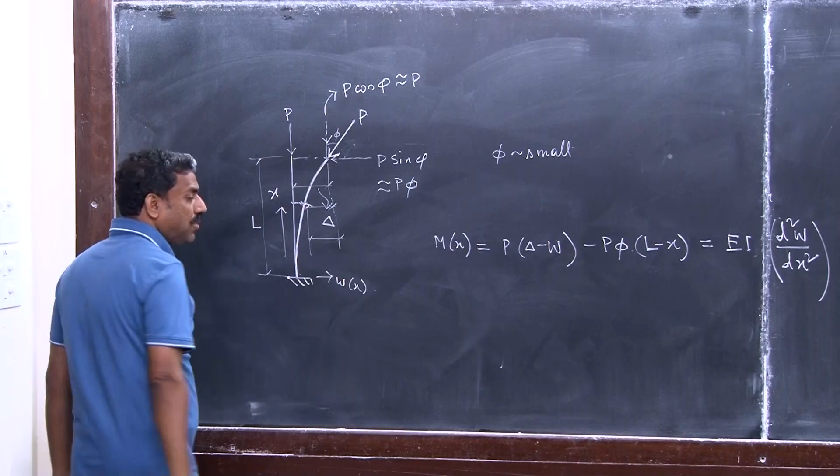The mass is concentrated here. We don't need to consider mass here because we are following a static approach. A column under follower force, we are first trying to solve by a static approach to see what will happen.

So M is equal to this. From here we get d2W dx2 plus P by EI, W is equal to P by EI delta minus P by EI, phi into L minus X.

So P by EI is equal to lambda square, as we assumed in the previous example. So I can write this as d2w dx2 plus lambda square W is equal to lambda square capital delta minus lambda square phi, L minus X.

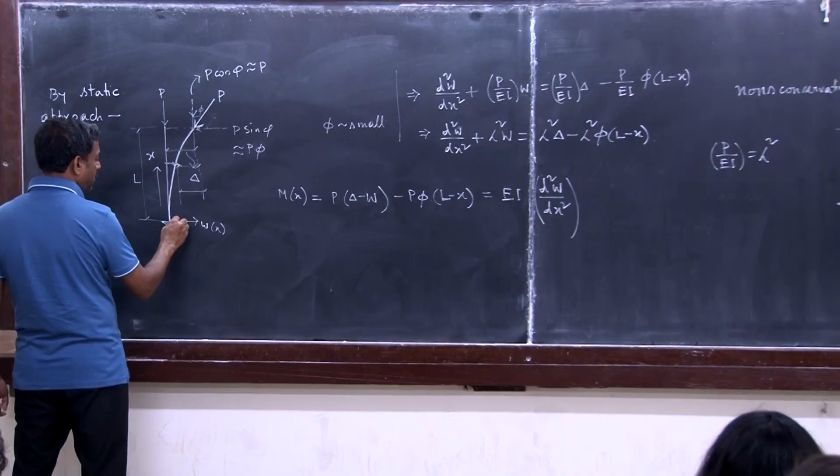That is the governing equation, and then we have boundary conditions. At x equal to 0, w is equal to 0, and dw dx is equal to 0.

There is no slope there, and at x is equal to L, w is equal to capital delta, and dw dx, that is the slope, is nothing but phi. These are the two sets of boundary conditions, at x equal to 0 and x equal to L.

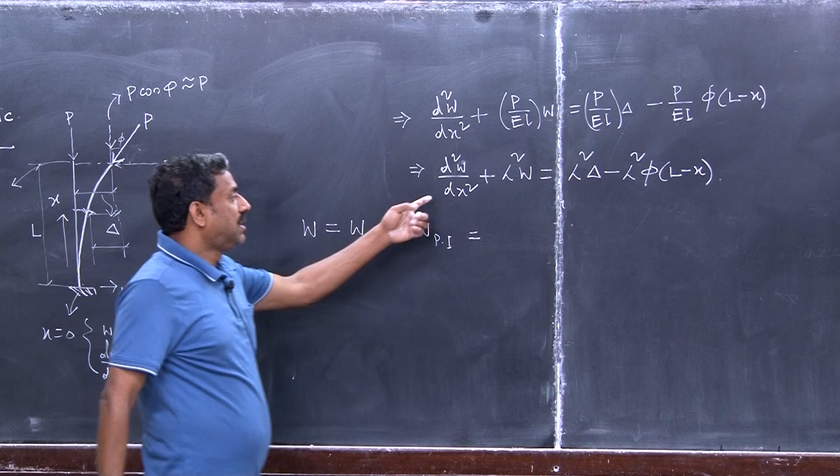The solution of W is a complementary function plus particular integral. For the complementary function, we see d square plus lambda square, so d equals plus minus i lambda, giving C1 e to the power i lambda by Euler's equation, which we write as A cosine lambda x plus B sine lambda x.

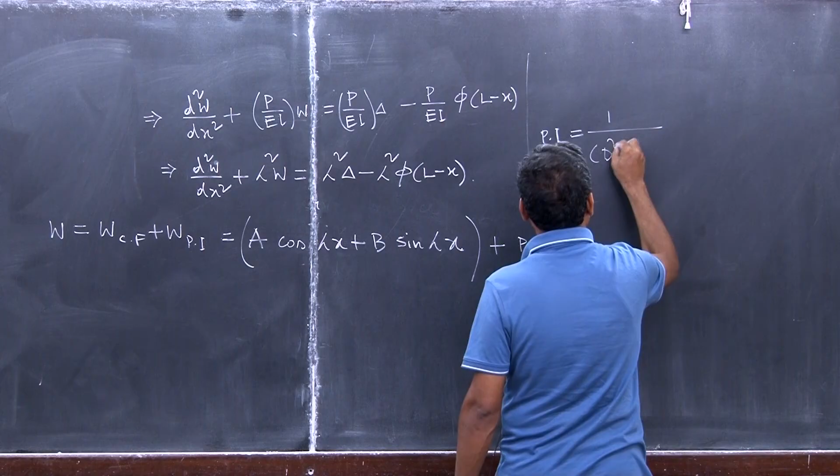That is the complementary function, and then we find the particular integral. The particular solution is 1 by d square plus lambda square times delta minus phi L minus x. Dividing numerator and denominator by lambda square, we get 1 minus d square by lambda square plus d to the 4 by lambda to the power 4.

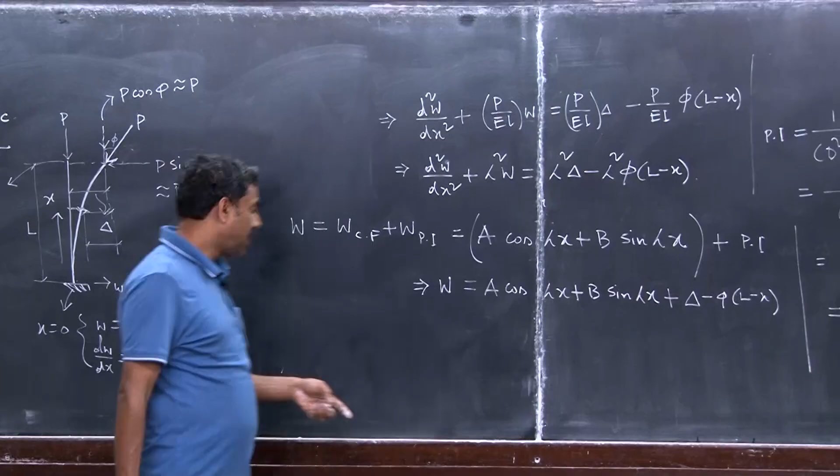So let us have the solution, and then we know the boundary conditions over there. Next class we will try to see further. Thank you very much for today's class.